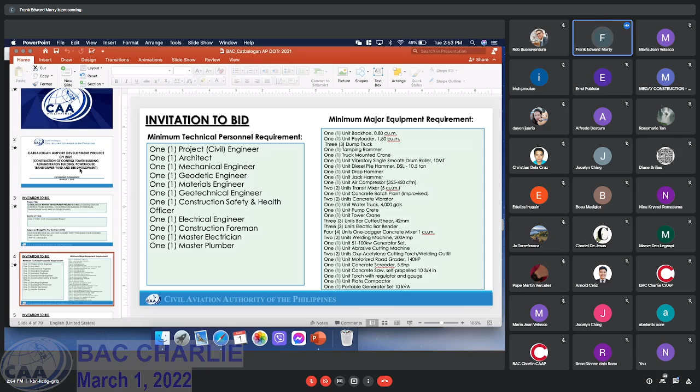For the bid data sheet, under ITB Clause 3.0, Certificate of Site Inspection, these requirements shall be included in the technical document submission, and it shall be signed by Mr. Norman Nunez, officer in charge of Catbalogan Airport, or his duly authorized representative. Together with this certificate, it shall also include a copy of the company ID of the person who conducted the site inspection, a copy of the airport or facility visitor's logbook with an entry of the name of the person who conducted the site inspection, and a picture of the proposed site together with the person who conducted the site inspection and the airport representative.

In ITB Clause 5.2, the similar project for this project is building, construction, improvement, rehabilitation, repair, and the ABC is 101,130,438 pesos and 45 cents.

ITB 7.1, subcontracting is not allowed. ITB Clause 10.1, bidder shall submit all the eligibility and technical documents as specified in Section 10. We'll also show later the list of requirements. In 10.3, the PCAB license requirement is medium A license category B for vertical works, building and industrial plant.

ITB Clause 11.2, bids exceeding the ABC of the project shall be disqualified.

So this is the minimum years of experience required for our key personnel: 5 years in general engineering, 3 years in building construction, improvement, repair, and rehabilitation.

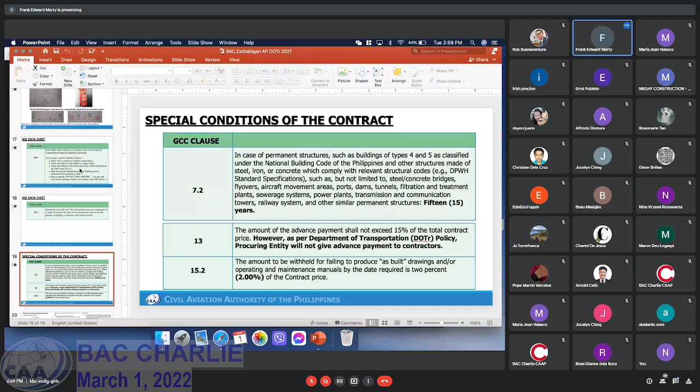However, as per DOTR policy, CAAP will not give advance payment to contractors. So no advance payment for this particular project, or in all projects of CAAP. Under GCC clause 15.2, the amount to be withheld for failing to produce as-built drawings and/or operating and maintenance manuals by the date required is 2% of the contract price.

For the project technical details, I'll be showing the site development plan. This is the layout of the airport. So in gray is the passenger terminal building.

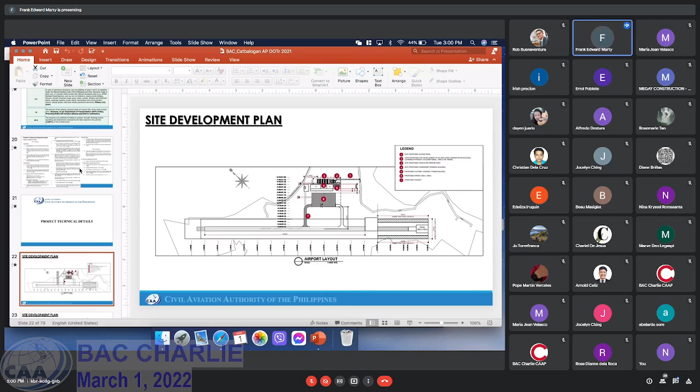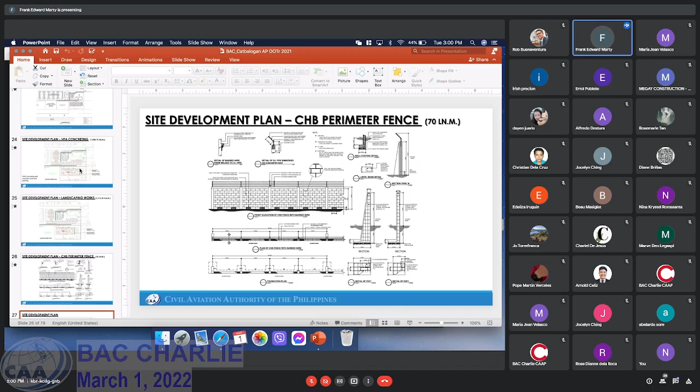So again, these drawings can be found at our back office. They will provide you the drawings and plans for this project: landscaping works, concrete hollow block perimeter fence, site development plan for security fence, covered pathwalk.

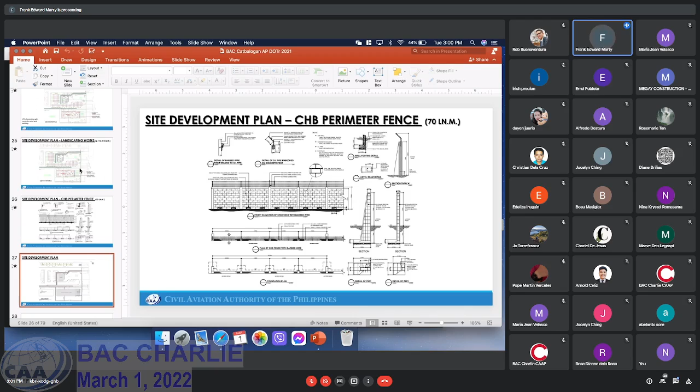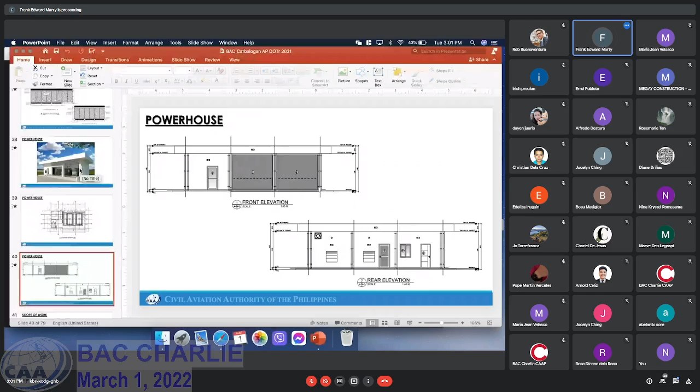So this is the perspective for the powerhouse, the layout or the plan for the powerhouse, elevations. So for the scope of work, here are the major scope of works: mobilization, demobilization.

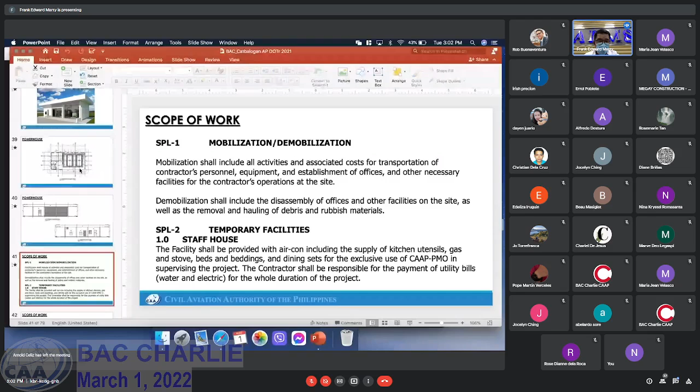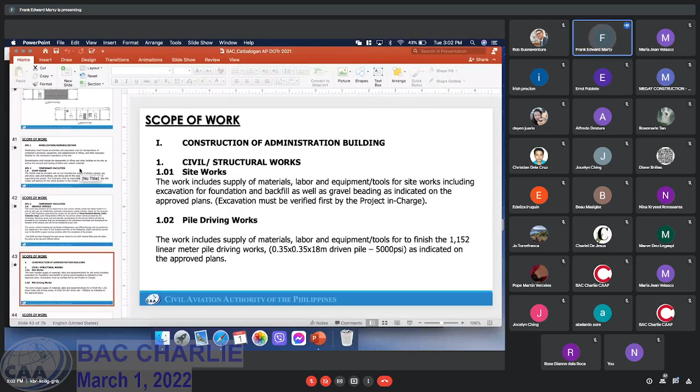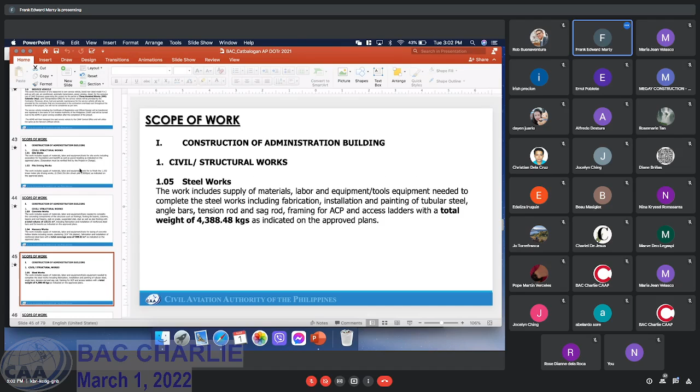For SPL2 temporary facilities, it includes staff house and the service vehicle for the project, which will be used within the period of the project, which is 390 calendar days. For the admin building, civil structural works,

that would include site works, pile driving works, concrete works, masonry works, and steel works. This is the architectural works for the construction of administrative building. It has indicated in your screens the area of coverage or the total area coverage for the project for this particular scope, construction of administrative building. So these are its components: electrical works, mechanical works.

Huwag po kayong mag-alala, lahat po ng details po dito nandun po sa bid documents po natin na downloadable po sa PhilGEPS at saka sa CAAP website. For the construction of administrative buildings, sa plumbing works, these are the details.

And for the admin building, it also includes furniture. For the construction of control tower building, the major work components include civil structural works, masonry works, steel works, moisture and thermal protection works.

For the architectural works naman po, para sa control tower building, this would include carpentry works, ceiling finishes, wall finishes, at saka tile works. Sa architectural works niya, it would include raised wall and precast wall works, painting works, doors and windows, toilet partition, concrete countertop, and accessories. For the construction of tower building, again, sa electrical works niya, these are the

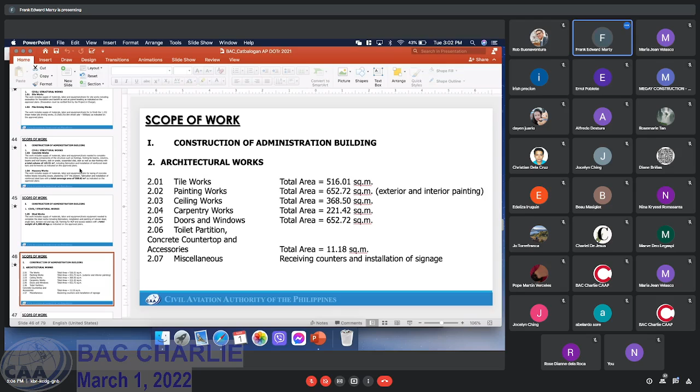At this juncture, we open the floor for any questions from our prospective bidders. Is there any? Good afternoon. Ano po bang mga katanungan? Ay, hello po, good afternoon. Si Errol po ulit ng SM Castro. Sorry Go sir, ahead, sir.

May ask ulit po kung ano po yung reason for rebid. For the rebid, sir, wala pong pumasa doon sa bid evaluation po, sir. During the bid evaluation, all the bidders who were initially rated as passed during the bid opening were declared disqualified due to non-compliance with the required materials, labors, and equipment. That is why it was declared a failure of bidding, sir. Thank you, sir. Salamat po.

The next item, Mr. Chair, will be presented by Engineer Joffet Vifranca of the ANS. Engineer Joffet, please. Thank you, Attorney Frank. Thank you, Mr. Chair. For the bidders, welcome to the pre-bid conference for the supply and delivery of communications equipment for Catbalogan Airport.

This is a rebid project under the bid number 21-028-10 Charlie. For our presentation for today, the discussion will be on the project duration and background, invitation to bid, the instruction to bidders with corresponding BDS, the GCC with the corresponding SCC, the checklist, and lastly, for the discussion and clarification regarding the project.

For this project, this project is a downloaded project from the DOTr, and it is under 2021 DOTR CAAP MOA for later release. And the scope includes the supply and delivery of IP-based 50-watt VHF AM transmitter and receiver radios, complete with the antenna system and the 8-channel voice logging system and its ancillaries. The project duration is 180 calendar days.